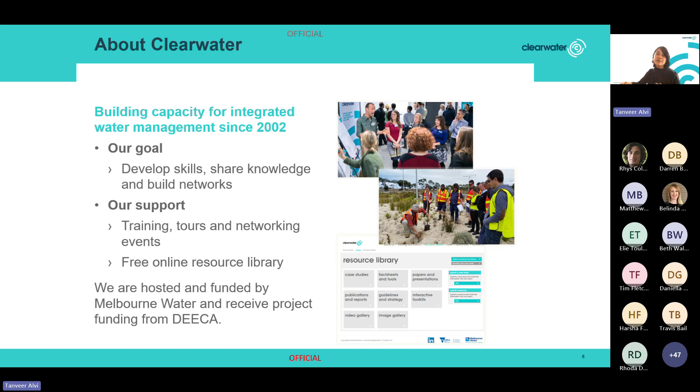We have a huge online library, I have a small inset over here. That is what our present resource library looks like. As you can see, we have case studies, fact sheets, presentations, video gallery, and trust me, there's a huge number of resources. This huge amount of data on the website is one reason that we are moving to a new website, which is really exciting. In a couple of weeks, if you visit our website and it doesn't look familiar, if the logo looks like this and the color palette looks like that, that's because we are rebranding and having a new website. You can still follow us on LinkedIn to keep up to date with all the changes.

Coming to our presenters, I'll quickly introduce Dr. Matthew Burns. He's a senior research fellow at the University of Melbourne. He's internationally recognized for his research in urban hydrology and stormwater management. He has 80 publications and over 4,500 citations, and his work highlighted the problems of urban stormwater runoff and advanced the understanding of flow ecology linkages, leading to better protection and restoration of our waterways.

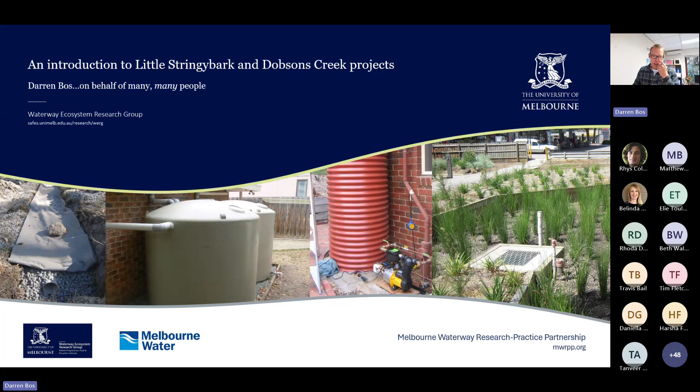Because we have quite a diverse audience, I am going to start by giving a little bit of background on the issues of stormwater, as I think we have some people in the audience who don't have a background in stormwater management. I'm also going to talk a little bit about the solution to that stormwater problem, and then I'm going to dive into why we undertook these projects and what work was completed in each catchment. And of course, that's leading us into the real reason why you're all here, and that's to hear about some of the results from our project.

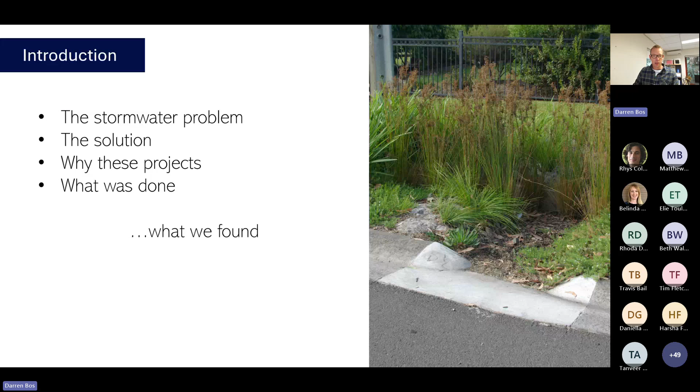So let's start with a little bit of that context. When we urbanise a catchment, we build roads and roofs, and then we typically install a whole range of stormwater pipes and pits to drain away any rain that falls on that catchment, on our newly built roads and roofs, and it drains away as stormwater. Those pipes are very, very efficient at delivering the water directly to the creek, and this completely changes the way in which water interacts in a catchment.

So in a forested catchment, when rain falls on a catchment, we see that most of the water is lost through evaporation or transpiration. A reasonable amount enters through the soil and flows to the creek as base flow, and very little amount of rain actually runs over ground and into the creek directly.

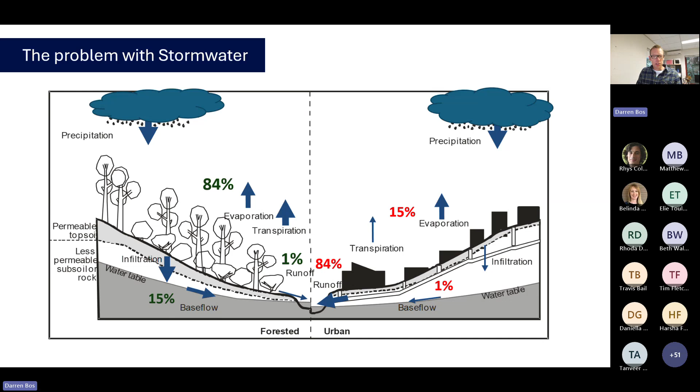Compare that to our urbanised catchment, we see a complete reversal of those figures. Now most of the water is actually delivered to the creek as runoff, and it's delivered very quickly and with a lot of force. Some water is lost through evaporation and transpiration, and very little water actually flows into the soil now because we've sealed a lot of the surfaces, so very little is delivered as base flow. What this does is it completely changes the hydrology of a catchment: how much water gets to the creek, how quickly it gets there, and the energy in that water when it arrives.

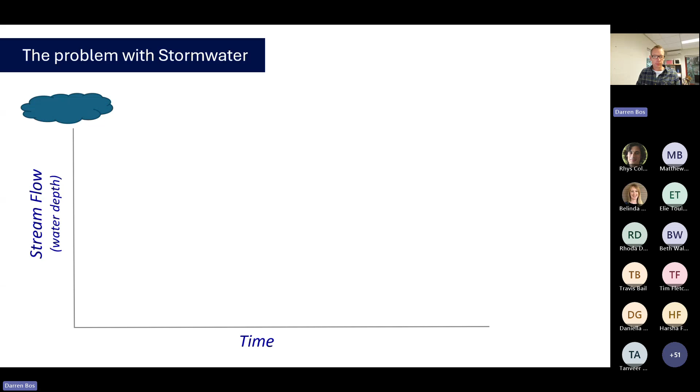So in this stylized hydrograph here, we can see that in an urban catchment, when we have rain, we get a really quick rise in flows or water depth in the creek, high peaks, and then quite a dramatic drop off in flows as well.

We also generally have a very low base flow in the creeks, compared to a forested catchment where we see that after rain those peaks are much slower to form, and they're much lower as well. They also have a longer tail, so the flows hang around and are a lot more steady.

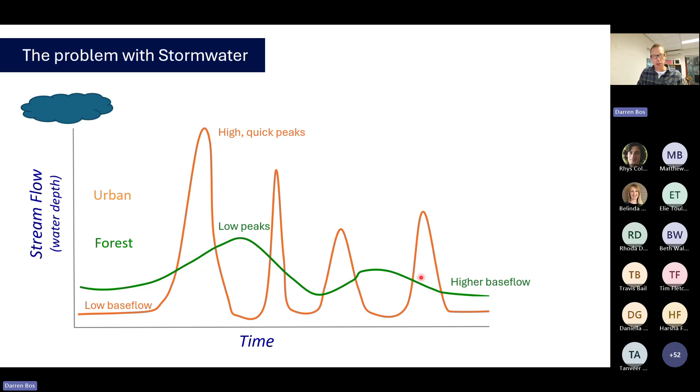What this change does is lead to these really high energy, high flashy flows in an urban catchment, which leads to severe erosion within the creek. The creek itself becomes quite channelized and loses engagement with the floodplain. We get a lot more mobilization of sediment, and the water becomes a lot more turbid with suspended sediments. That generally leads to a loss of habitat within the creek, and then we start to see a decline in biodiversity, particularly with species that are sensitive to these changes or that are used to more moderate flows and higher base flows.

If you add on top of that, stormwater pipes and pits are also very, very efficient at collecting pollutants and litter and delivering those into the creek as well. So you get this mix of dirty water and changes in hydrology, all affecting our creeks.

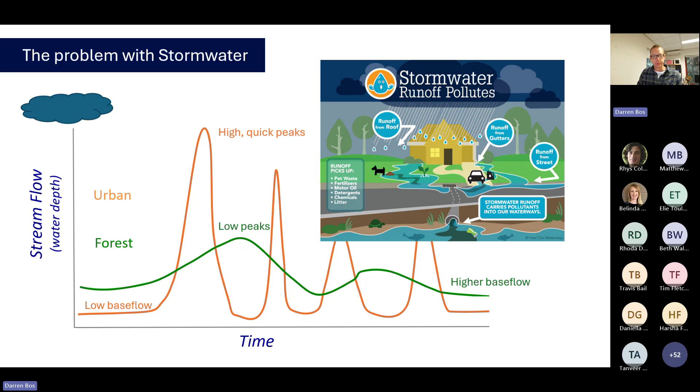Now, this is a very well-studied phenomenon across the world. It's not just exclusive to Australia.

Also well studied is the application of stormwater control measures to address this problem. Stormwater control measures are any asset effectively constructed in a catchment that helps reduce peak flows, return base flow to the creek, and improve water quality. They can include things like, but not limited to, rainwater tanks, rain gardens, or vegetated infiltration basins.

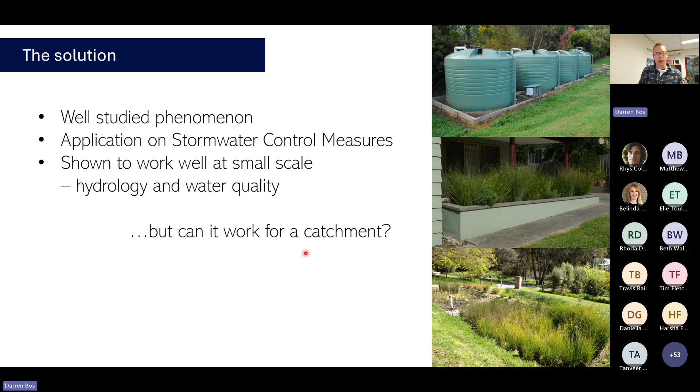Those stormwater control measures have been very well studied as well, and they've been shown to have really positive impacts on the hydrology and water quality of stormwater at a local scale. But prior to the Little Stringybark Creek and Dobsons Creek projects, there remained a question of what would happen if you applied this across the catchment. How effective would they be if you did it en masse rather than just at the allotment scale? In short, that's essentially what these projects were designed to answer.

Can degraded urban streams be restored by application of dispersed stormwater control measures? Specifically, the goal of those projects was to install as many stormwater control measures as they could in those catchments, jam in as many as they could fit, within the constraints of funding, space, and time they had. But the real goal was to treat as well as they could, as much impervious surface as possible, those hard surfaces that were impacting upon the creek.

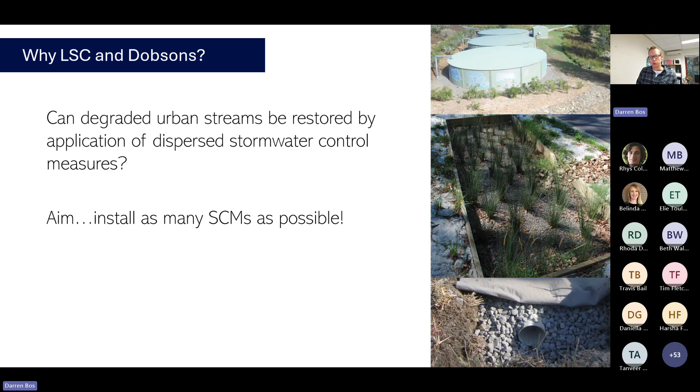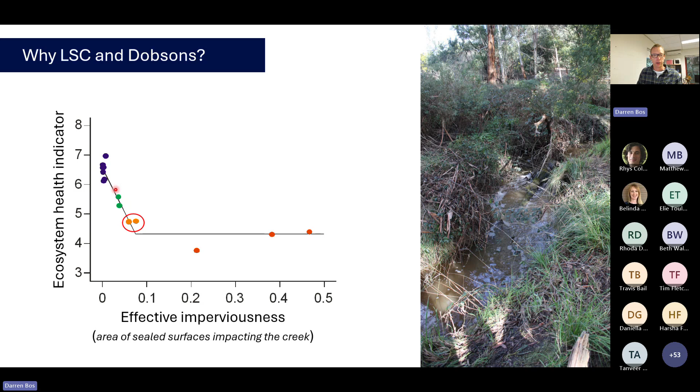All right, so a little bit about the two projects. Little Stringybark Creek is in Mount Evelyn, east of Melbourne, in the Dandenong Ranges. There are about 1,100 properties in the catchment, of which about 830 are connected to and impacting upon the creek. Most of those are up in the upper catchment. The lower catchment is mostly large rural residential properties, while the upper catchments are mostly residential. We have a small industrial site and a few schools as well, which are all big contributors to the issue of stormwater to the creek.

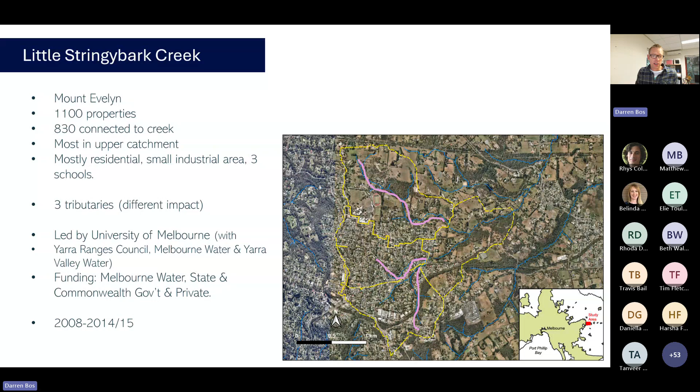There are 3 tributaries in this catchment, which is important, and Matt will elaborate on that a little later. This project, Little Stringybark Creek, was led by the University of Melbourne, in collaboration with Yarra Ranges Council, Melbourne Water, and Yarra Valley Water. It was funded through a combination of Melbourne Water, state and Commonwealth government funding, and also contributions from private landowners. It commenced in 2008 and ran until about 2014, 2015.

In that time, we installed stormwater control measures in just over 230 residential properties. All of those properties had a rainwater tank connected to internal supplies, like toilet, washing machine, some hot water. Some of those tanks were also leaky tanks—a leaky tank has a passive orifice that slowly leaks water back either into the stormwater or onto surrounding vegetation. A lot of our tanks also had infiltration trenches or some sort of rain garden, to encourage base flows back into the creek.

The participation of residents was encouraged through a combination of education and incentives, but I'll be talking a little more about that in my second presentation after Matt has spoken.

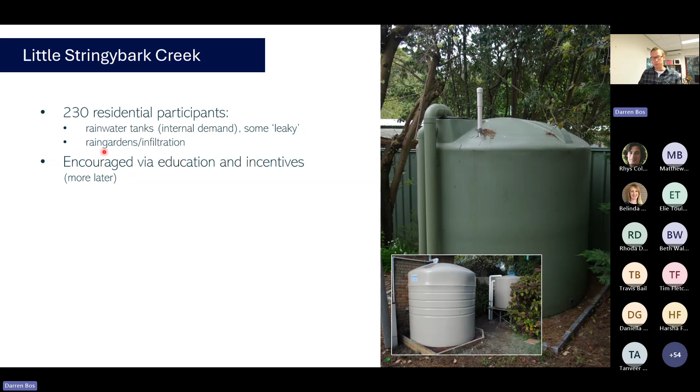Of course, we also had to address the non-residential hard surfaces, impervious surfaces contributing to the creek's health. So we installed 90 non-residential stormwater control measures, including public reserves and roadsides—roads are a big contributor to the problem of stormwater—schools, the industrial site I mentioned earlier, and also the one petrol station in the catchment.

So those non-residential stormwater control measures ranged in size from this large example here. This is at Morrison Reserve - over 700 kilolitres of tank used for irrigating a nearby sports field. It overflows into a series of infiltration basins, and also leaks out water during winter to provide capacity in the tank. So it ranged from that really significant, high investment site to much cheaper, simpler systems.

So this is just a small roadside vegetation infiltration rain garden - it's a mouthful. That's really just probably a few square metres in size, treating perhaps 100 metres of road.

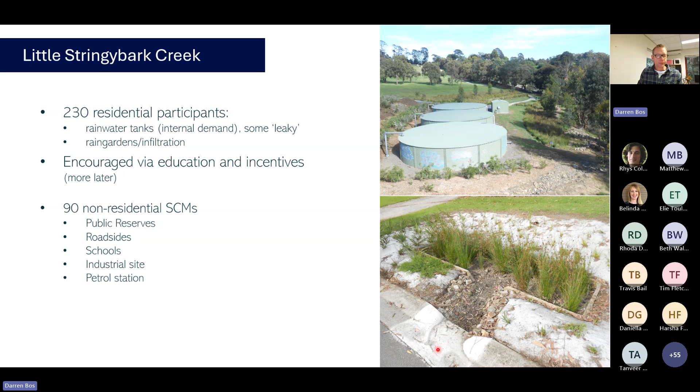So for Dobsons Creek, located in The Basin, also in the Dandenong Ranges, it's a bit smaller in terms of the number of properties impacting upon the creek, mostly residential for this catchment. But interestingly, this is quite different - the development is lower in the catchment, so the headwaters are all forested, which plays a bit of a story in our findings as well later.

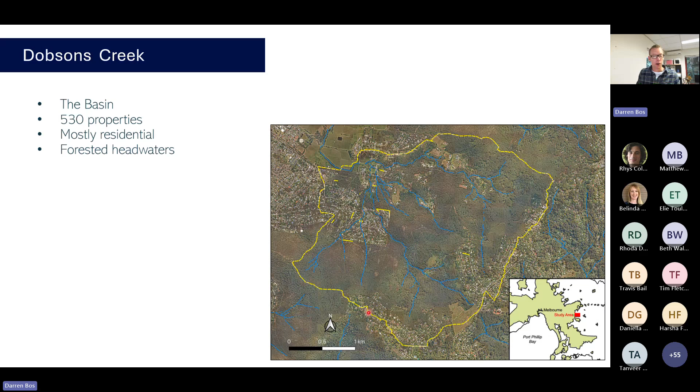This project was different in that it was led by Melbourne Water in collaboration with Knox City and South East Water, and was funded primarily through Melbourne Water with some state government investment as well. It was delivered between 2012 and 2017.

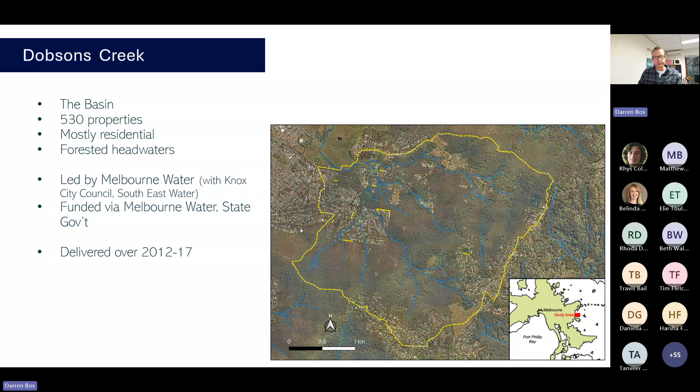They had around 250 residences, a little bit more than Little Stringybark Creek. They only used tanks, but they had two types - tanks for internal supply, again to toilet and washing machine, and some dedicated tanks which were leaky tanks, just providing storage capacity and some base flow replication as well.

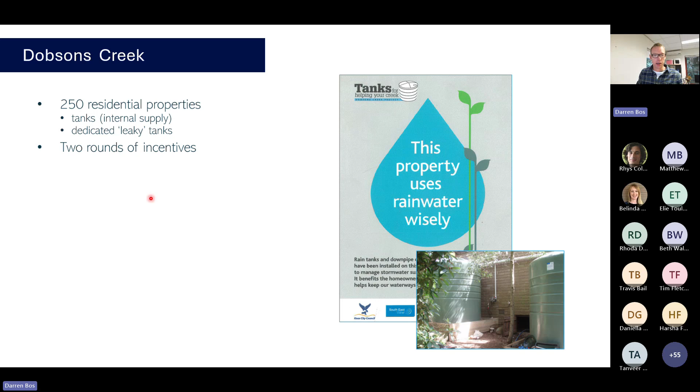And they delivered their tanks through two rounds of incentives. They also did some non-residential works on streetscapes, though not as many as Little Stringybark Creek. That was partly because they had quite a large, significant infiltration basin at the bottom of the catchment in Wicks Reserve, which did a lot, or provided a lot of treatment for the non-residential works and areas as well - a really significant size system there.

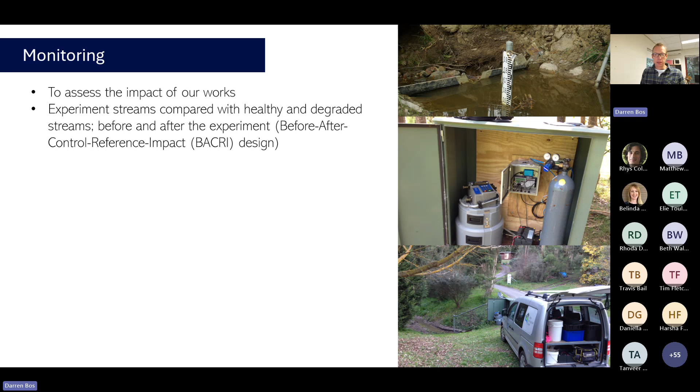Right, so as you can imagine, we needed to assess if all of these works were going to have an impact. To do that, we developed quite a comprehensive monitoring program. In this program, we compared our experimental streams with both healthy and degraded streams in the Dandenong Ranges, and we did that before and after our experiment.

Specifically, we monitored some assets for their performance, so some tank monitoring as well as some of our infiltration rain garden monitoring. We continuously monitored stream hydrology, and intermittently monitored water quality, the macroinvertebrate community, diatom community, the benthic algal biomass, and leaf litter decomposition.

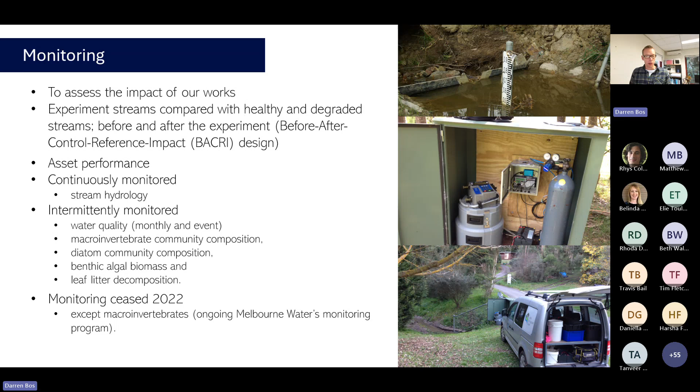And that monitoring continued from sort of 2008 or even prior, so we had some pre-works data as well, and up until 2022, although the macroinvertebrate data is still being collected as part of Melbourne Water's ongoing monitoring programs.

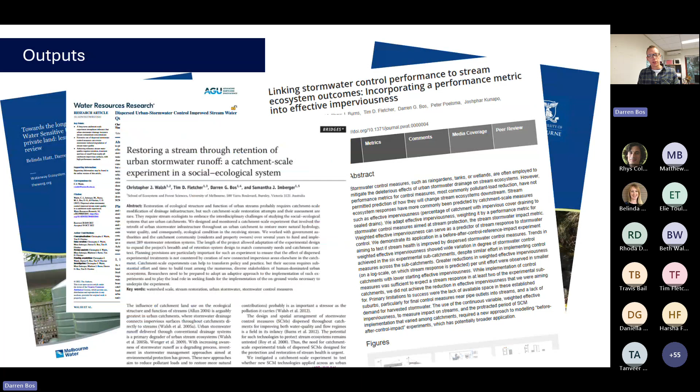As you can imagine, with such complex long-term research projects, there has been a lot of knowledge generated. This knowledge has focused not only on the key research questions around the impacts of stormwater on streams and the restoration of those through disconnection of the catchment, but also complementary research, such as how you engage with the community and local government, how you measure environmental impact, and so forth.

So lots of papers, conference presentations, YouTube videos, reports, newspaper articles - you name it, we've kind of done it. But of course, all this is really culminating now in a series of fact sheets that we have prepared, and that's really the catalyst for today. These fact sheets summarise not only the scientific findings of these two projects, but also the practical findings and insights, based on reflections of the research team or the people involved in delivering these projects. And we hope that these fact sheets will help to inform and guide planning and delivery of future waterway management projects.

They cover a whole range of topics, so there's 10 of them in total, and we will be just talking about a few of them today. We'll have to talk about others perhaps at another event another time.

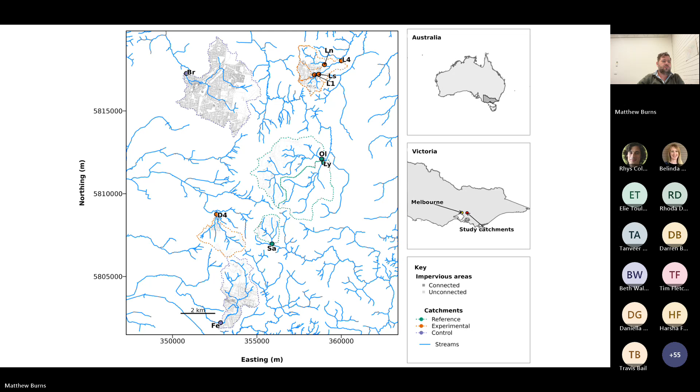As Darren said before, a lot of the basis for this project is the idea that if we can disconnect impervious areas, if we can improve the way we manage stormwater in these catchments, we might be able to improve the stream's ecological condition.

It's important to note that this study is an example of a retrofit project - probably the hardest context to do this work. The theory is that by implementing stormwater control, hopefully the ecological condition of Little Stringybark Creek and Dobsons Creek will start to trend towards the condition of the reference sites and away from the condition of the degraded control sites.

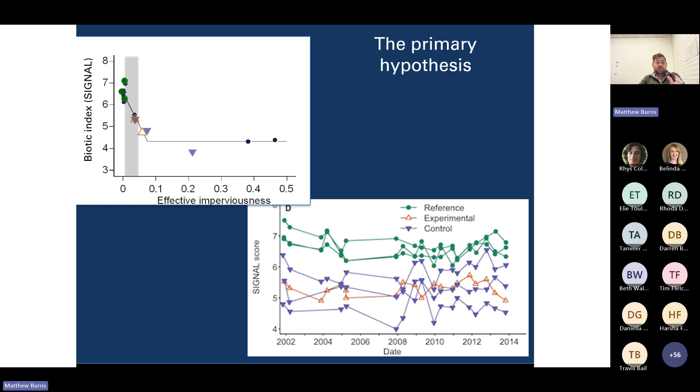Another important feature of the experimental design is that it allowed us to make sure that if we see an effect in Little Stringybark Creek or Dobsons Creek, it's because of the improved stormwater control, not because of things like climate.

I'm going to talk through some different responses that we think should happen when we disconnect impervious areas and reduce effective imperviousness, and then highlight what we found from those various responses.

The main experimental manipulation is to reduce connected imperviousness - that's what we set out to do. When we do that, theoretically, we should see some hydrological impacts, like reduced size and frequency of polluted stormwater runoff, and we should theoretically increase base flows and their quality.

As Darren said before, urban streams tend to have lower base flows. So through increased infiltration, we should increase those filtered flows and their quality.

The changes to hydrology and improved treatment of stormwater should lead to some water quality impacts, like reduced nutrient concentrations. Because we're slowing down stormwater flows and reducing that hydrologic impact, there should also be some geomorphic impact, like reduced transport of coarse sediment - we should start seeing more sand and gravels in Little Stringybark Creek and Dobsons Creek.

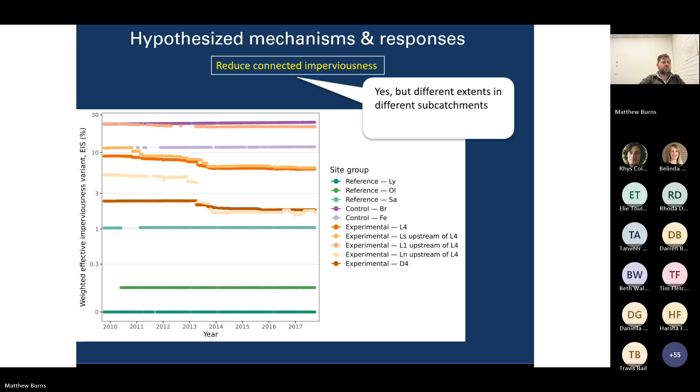Just another thing to quickly say is that the way we measured reductions in effective imperviousness took into account the performance of the stormwater control measures we implemented. That was a really important piece of work that Chris Walsh, a colleague, led, because you can imagine that a rainwater tank that might not have much demand or isn't performing very well, compared to one that is performing really well, will have quite a different ability to effectively disconnect that impervious catchment.

That's why it was really important that we spent a lot of time measuring and modeling the performance of these different stormwater control measures, and including that modeling and performance in the way we actually assessed our measurement of reductions in impervious area. There's a fact sheet, I think fact sheet 8, which talks about that.

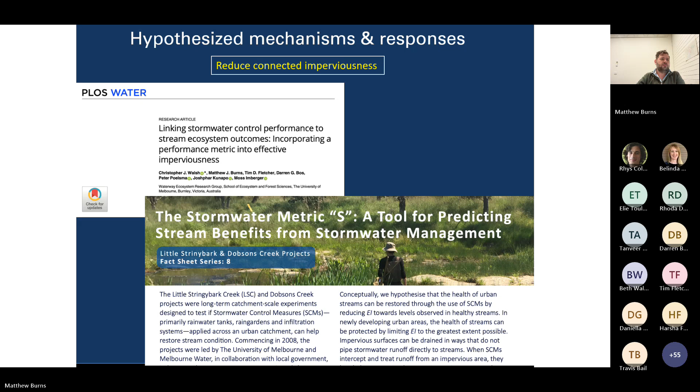So coming back to our responses, we can give a tick that we reduced connected or effective imperviousness. I'm now going to talk through some hydrology results. Did the experiment reduce the size and frequency of storm flows? We had a former student, Congying Li, who was a critical component of this hydrological assessment work, and there's a journal paper close to being published which talks about these results.

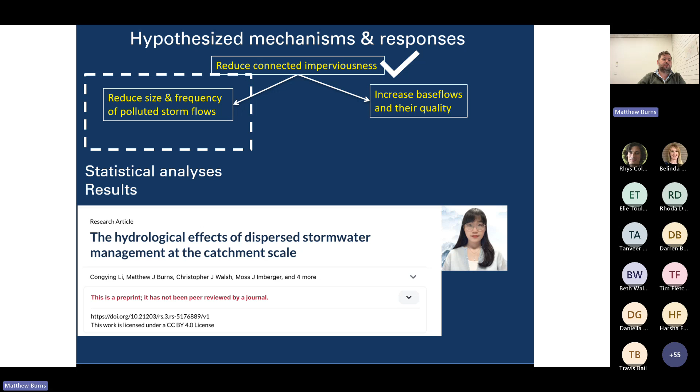In our urban catchments, we know that we only need a small amount of rainfall to cause a big pulse of stormwater, and that's what Darren started off his talk talking about. So for our urban sites, we have some rain, and that rain generates a big pulse of stormwater. A small amount of rain causes a big pulse of polluted stormwater runoff, which we can also call quick flow or direct runoff.

Theoretically, when we implement stormwater control measures, we should see quite a different hydrograph or flow response. We should have a lower peak flow, and importantly, a much smaller volume of quick flow, because we're retaining water, harvesting water, and infiltrating water. So the whole basis of this hydrologic analysis was to see, in Little Stringybark Creek and Dobsons Creek, have we reduced the volume of this quick flow in storm events, and have we also reduced these peak flows?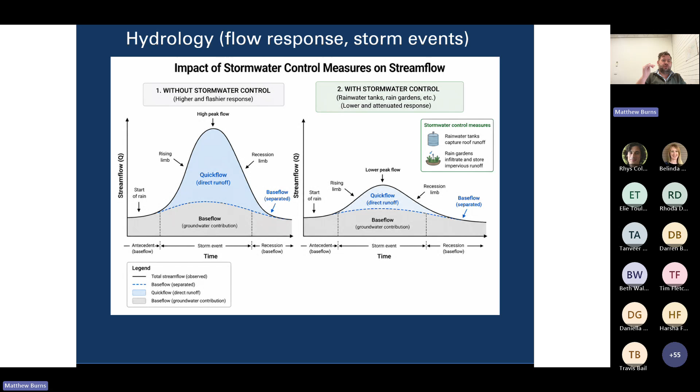And so to answer that question, we did some statistical analyses. This former student, Sung-Ying, spent about 3 months of her life identifying 6,500 storm events across our study catchments. From each of those storm events, we calculated quick flow volume, essentially the amount of impervious runoff or stormwater generated following rainfall events, and also calculated peak flow.

We developed a statistical model that was run in R, which is some computer software that we can do these statistical tests in. When running these statistical models, we included things like the effect of the stormwater control measures, basically capturing all the rainwater tanks, rain gardens, and other measures implemented, and of course took into account other things like rainfall and antecedent conditions. This statistical model allowed us to be pretty confident about whether these measures had an impact on the hydrology.

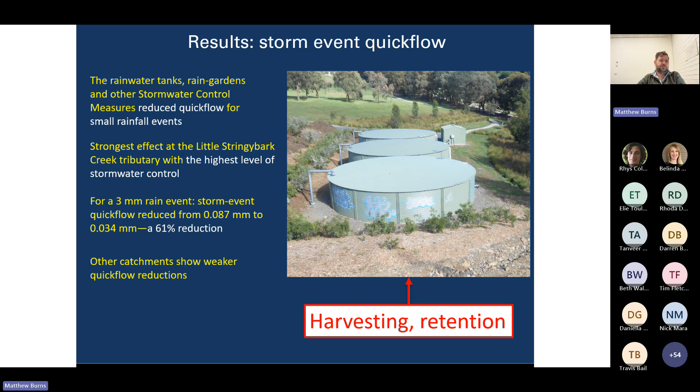A big reason for this reduction is that the project had a really strong focus on stormwater harvesting, on retaining stormwater in the catchment. Lots of rainwater tanks were connected at the household scale, many used for toilet flushing, clothes washing, hot water usage, and outdoor irrigation. There were some really large tanks - as Darren said, 750 kilolitres of storage, with water used to irrigate two really big ovals. This strong focus on retention was a key reason why we saw these results in terms of reducing quick flow volume.

In terms of storm event peak flows, we also found that the stormwater control measures reduced peak flows. In particular, for this tributary with the highest levels of disconnection, we found near-reference peak flows for up to 12 millimetre rain events, or 86% of the days. In other words, for most rain events, the peak flows in this tributary were hydrologically almost similar to what we saw in our reference condition stream. So another really good result there.

The effects we saw on peak flows were clearer across all catchments compared to the results for quick flow volume. While we got stronger results for peak flows, it's because all the systems we built might not provide high levels of retention, but they all provide good levels of detention and attenuation. For example, with rainwater tanks, there's always going to be some detention provided above the overflow pipe, and similarly with rain gardens and other measures - these systems can work quite well for attenuating peak flows. So that's sort of, at least hydrologically, why we saw stronger results for peak flows.

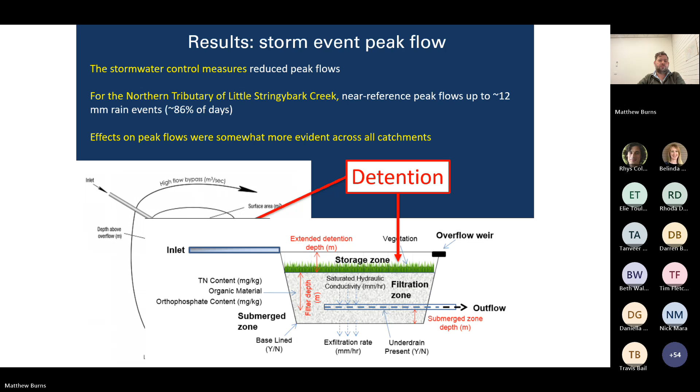So just a quick discussion around the hydrology. We found that our stormwater control measures can alter urban flow regimes in the context of a catchment retrofit, with reductions in quick flow and peak flow at the catchment scale. Our strongest evidence for that was when implementation intensity was high.

The real reason we saw these results is that these stormwater control measures were designed with hydrologic objectives in mind. We designed these measures to reduce the frequency of runoff delivered to streams, reduce stormwater runoff volume, and increase filtered flows or base flows. We also really tried to capture runoff from all impervious surfaces in the catchments. These principles that I've just been speaking about were published in a paper that we can send around.

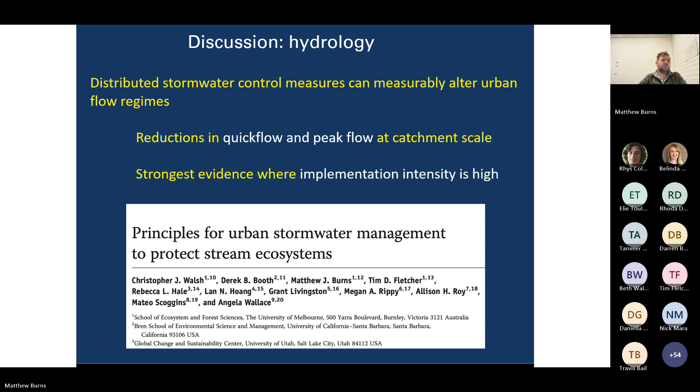Another important part of the results is that they were dependent on the rainfall event size. We found that the stormwater control measures were most effective at small, frequent rainfall events. In very large events, there were diminishing returns because the measures have limited storage capacity.

This is important because we think the primary stressor to in-stream ecological values is these frequent rainfall events. This is some work my colleague Tim Fletcher did. Tim showed that if you can retain even 5 or 10 millimetres of runoff, you can get really big reductions in how many days of runoff per year stormwater is delivered to the stream.

For example, if you can retain 10 millimetres of runoff, you can reduce the days of runoff per year from around 95 days to 20 days a year. So even capturing small amounts of runoff can have a really big impact.

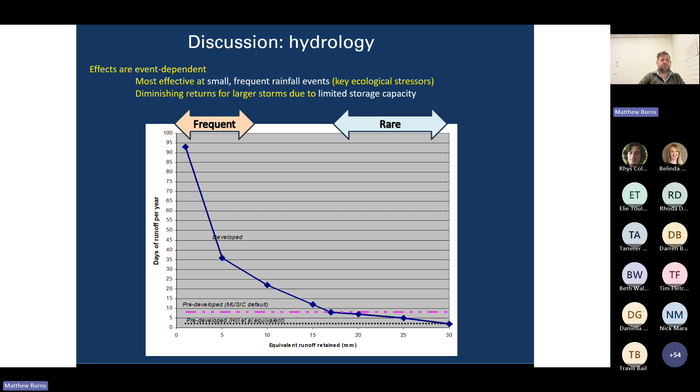Another point about the hydrology: we've seen these hydrologic results in Little Stringybark Creek and Dobsons Creek, but a word of caution that we can't easily transfer these results to another catchment. Obviously all catchments are different. The catchments we've worked in have quite clayey soils. If we were to do this project in a catchment with sandy soils, the results would have been different.

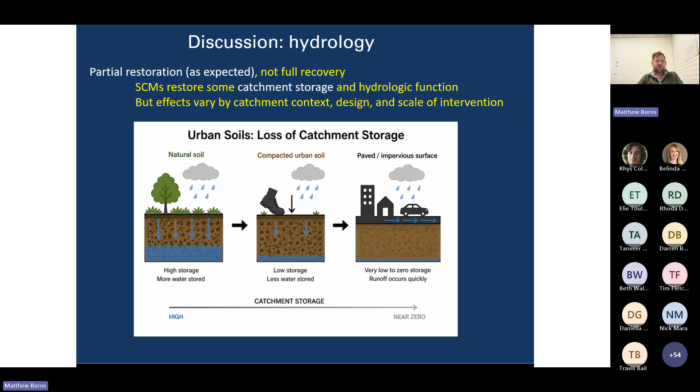Another point to make is that completely returning flows from a degraded urban stream back to natural is probably going to be difficult. One reason is that through the process of urbanisation, things like the soils get changed so much, and getting back to those very high levels of storage in a natural catchment is probably going to be difficult, but it's definitely still worthwhile doing.

So we've reduced the size and frequency of polluted storm flows. In terms of base flows, we're still doing analysis on that. With lots of infiltration, theoretically we should have increased base flows. We're still doing some work on that. We think through the water quality results there might be evidence of increased base flows, but we still need to do that formal analysis.

Okay, so I hope I'm going okay for time. Maybe, am I, Darren? I can't see anyone, but I don't know. Sorry. Yeah, okay, we still have like 10 minutes or 15 maybe. So yeah, great, we're good.

Okay, that's good. All right, so I'm going to talk now through the water quality results. Have we reduced nutrient concentrations because of the improved stormwater control? Our colleague Chris Walsh, who a lot of you would know, led this particular bit of work. I'm going to talk through the approach.

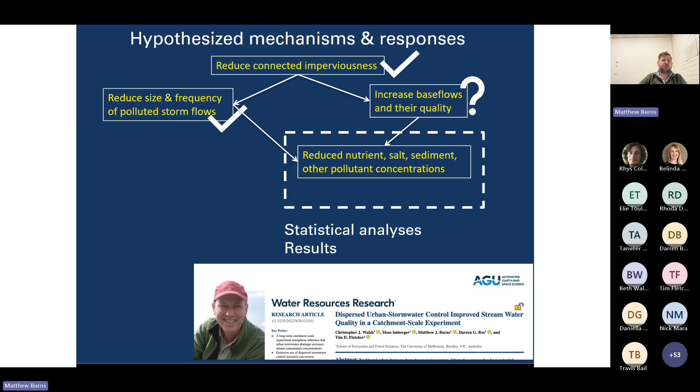In terms of the water quality, as Darren said, we monitored the water quality in our reference control and experimental sites. The water quality monitoring occurred over a pretty long period, 18 years of monitoring. It wasn't continuous for those 18 years, there were some little gaps in there, but it's a really large data set.

In terms of the water quality, we took regular samples. I went out there occasionally, but we had a lot of other great staff who led a lot of that work. We took regular samples, every month, every second week during dry flow conditions, and we also really aimed to get samples during wet weather.

In the field, we measured electrical conductivity and temperature. In the lab, we collected water quality samples and tested for total nitrogen, total phosphorus, nitrate and nitrite, ammonium, filterable reactive phosphorus, and total suspended solids. We took those water quality samples to a lab at Monash University.

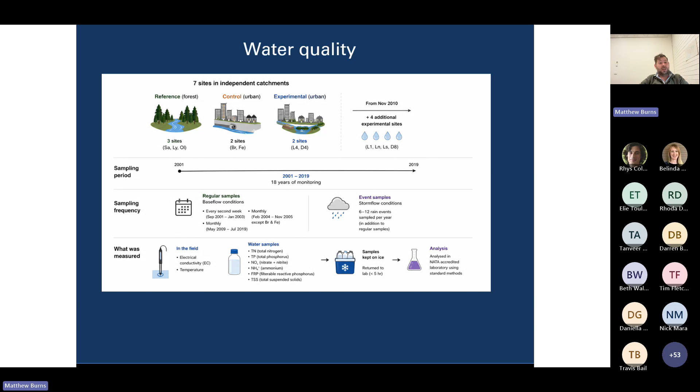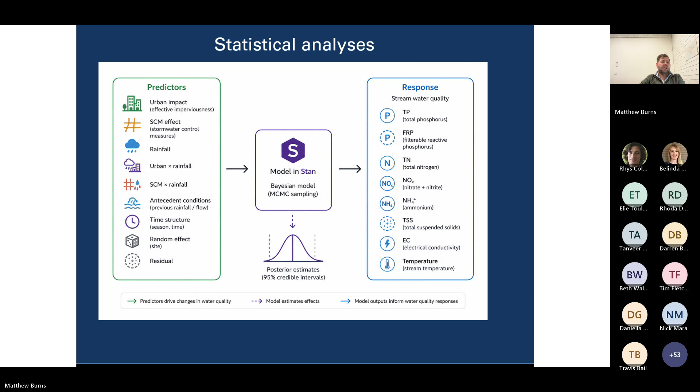So in terms of the water quality, we had some pretty encouraging results. We found that the stormwater control measures reduce nutrient concentrations under low flow conditions. Total phosphorus and filterable reactive phosphorus were reduced, and for some sites with very high levels of treatment, concentrations of these nutrients approached reference levels in dry weather.

We also found that total nitrogen and nitrate and nitrite were reduced, although the response for these parameters was a bit more variable, confounded by the fact that in these peri-urban catchments there are quite a few septic tanks, which are old and leaking, confounding the results a little in terms of the nitrogen story.

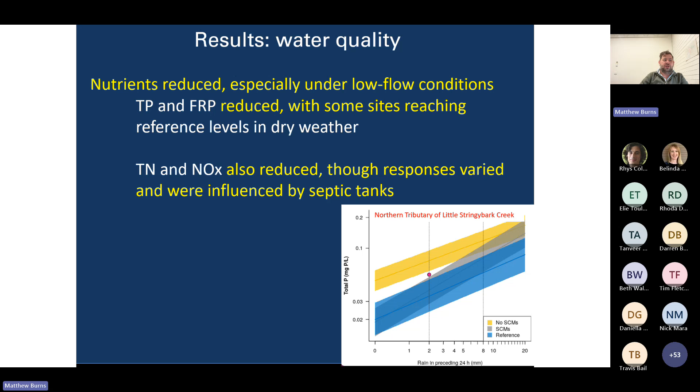Another water quality result related to temperature. We found that the stormwater control measures improved the thermal regime in these experimental sites. Our urban sites without stormwater control measures were 4 to 5 degrees warmer than our reference site, quite a difference. But importantly, installing the rainwater tanks and rain gardens reduced in-stream temperatures towards the reference condition, especially in summer low flow. So potentially a really good result there.

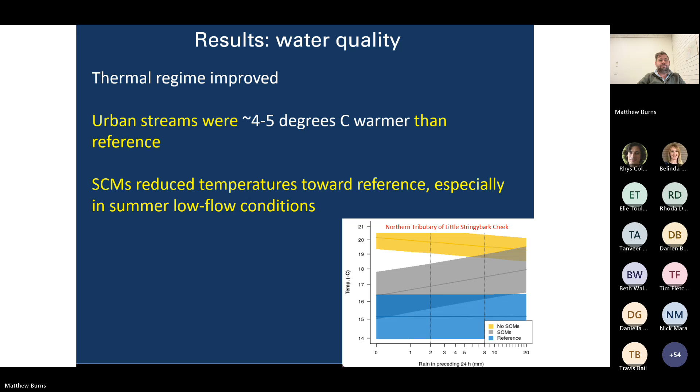In terms of some of the other results, there was a mixed or no response for some of the other variables. For total suspended solids, we didn't detect any effect of reduced imperviousness, and we think there could be some geomorphic reasons why that's the case, such as some resuspension of sediment from the stream banks.

In terms of electrical conductivity, or salinity, we found that it actually increased with the installation of the stormwater control measures. We're still working through that, and it could be that because we've increased infiltration and groundwater flows, some cooler but saltier groundwater is getting flushed into those systems.

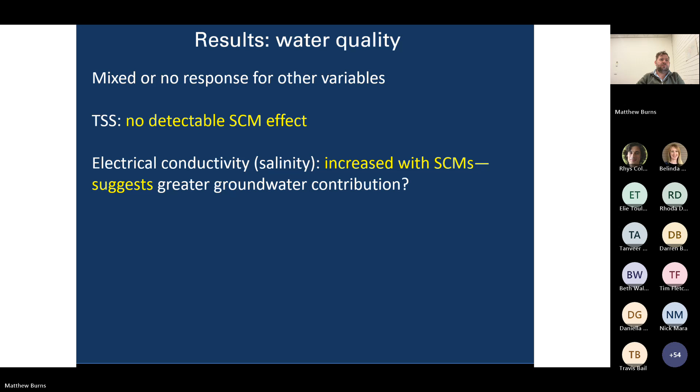So just a bit of discussion around the water quality. It's pretty cool that the water quality impacts are reversible. We can see improved in-stream water quality by implementing stormwater control. But similar to the hydrology, the strongest effects that we saw occurred in the catchments where we had substantial intervention.

One of the really important reasons why we've got these good water quality results is through some of these systems that Darren spoke about that were at the end of catchment, providing a final treatment of water before discharge into the waterways. A really good example is the Wicks Reserve Rain Garden in Dobsons Creek, a really large rain garden - I think its claim to fame is the largest in the Southern Hemisphere.

But it's doing a really good job of providing a final treatment effect. And there's a lesson for future developments: where you can, reserve some space near where the pipe outlets are to the stream for that final treatment.

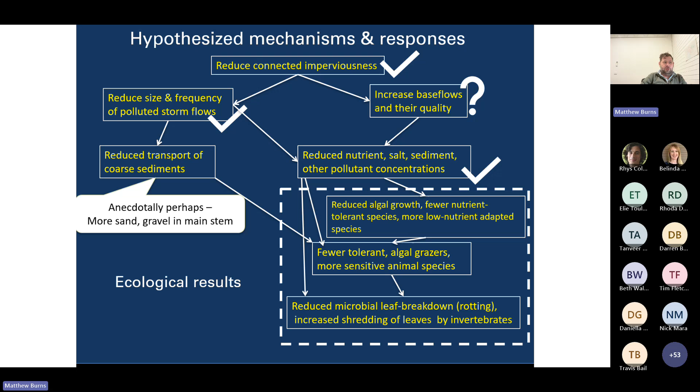So in terms of the stream ecological results, so far we haven't seen any change in some of the standard biotic indices. Things like SIGNAL score and LUMaR score, these are macroinvertebrate family composition metrics, and so far we haven't found any response to the stormwater control measures.

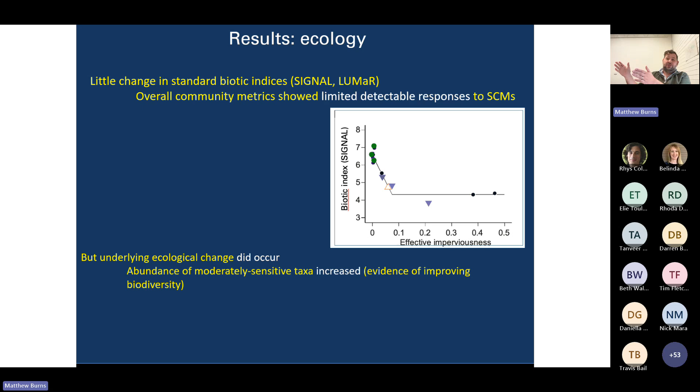But we have seen some underlying ecological change. For Dobsons Creek, we've seen that the abundance of some moderately sensitive taxa have increased, and so there's some evidence of improved biodiversity. We think that could be related to the fact that Dobsons Creek's headwaters are forested, whereas in Little Stringybark Creek that's not the case.

We've improved flow, we've improved water quality. To really promote this sort of further ecological recovery, we might need to start thinking about doing some in-stream works, things like maybe some riparian planting to improve habitat, and also thinking about putting some more coarse material into the stream, maybe sort of injecting some gravels or coarse material. That might be really important to support this recovery.

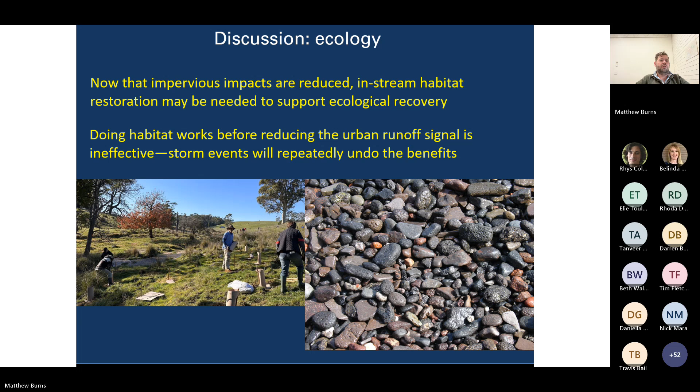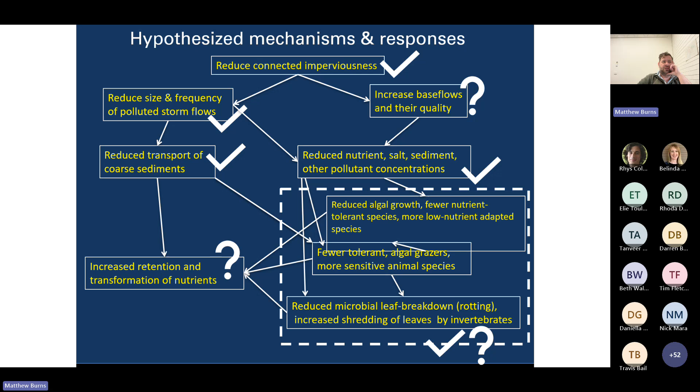So I guess I'm almost done. Just thinking about some other points as part of this whole retrofit project, if we want to really fully restore these degraded urban streams, we really need to get our head around this idea of trying to retain runoff from all impervious surfaces.

Not just a subset, and we've got really good evidence from that, particularly looking at this tributary where almost all impervious surfaces drain to some kind of stormwater control measure. Of course, as what Darren was getting to, there were some practical constraints which limited our ability to disconnect further.

A really big constraint was limited public space for stormwater control measures. We pretty much used up all council land, for example, that we could. So if we had more public open space, we probably could have actually built more stormwater control measures, or built larger ones than we ended up doing.

Another practical constraint was partial uptake by private landowners. As Darren mentioned before, in Little Stringybark Creek there were, I think, about 800 households. We ended up doing works on around 200 to 250, but there were hundreds of households that weren't engaged at all in this process.

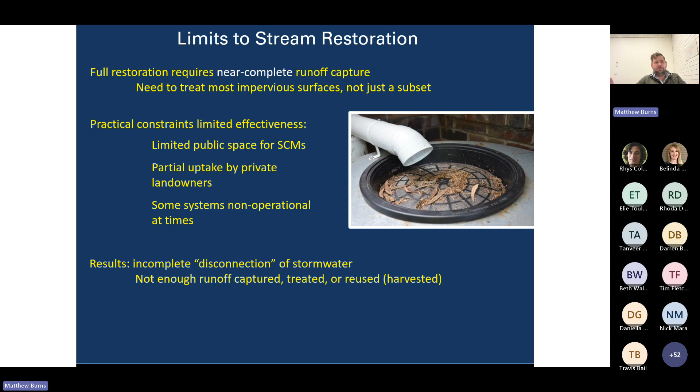Another important constraint was that some systems were non-operational at times. Maybe 20 to 30% of some of the rainwater tanks failed due to things like poor maintenance, pumps failing, things like that. In the end, I mean, we did an amazing job I think, particularly in this retrofit catchment, of disconnecting stormwater, but there were still opportunities to capture more runoff, to treat more runoff, and to use more runoff.

Another key takeaway for practice - we tested this idea of improving stormwater management in the hardest context, which is the retrofit context, the existing urban catchment. But we showed that it can be done.

We can implement rainwater tanks and other stormwater control measures if we design them to achieve certain hydrologic and water quality objectives - reduce runoff volume, reduce runoff frequency, improve base flows, treat water quality - then we can see in-stream improvements in hydrology, water quality, and in-stream ecology.

But in this particular retrofit example, we were limited by lack of participation in some cases, lack of space for systems, and we had trouble finding enough demand for stormwater.

But the lesson here is that for new development areas, for greenfield development, we can design everything from the start to be perfect, in the sense that we can make sure we allow enough room for our stormwater control.

We can make sure that, similar to what South East Water have done in Aquarevo, all new houses built have a rainwater tank with high water use, things like that. So a really important lesson there.

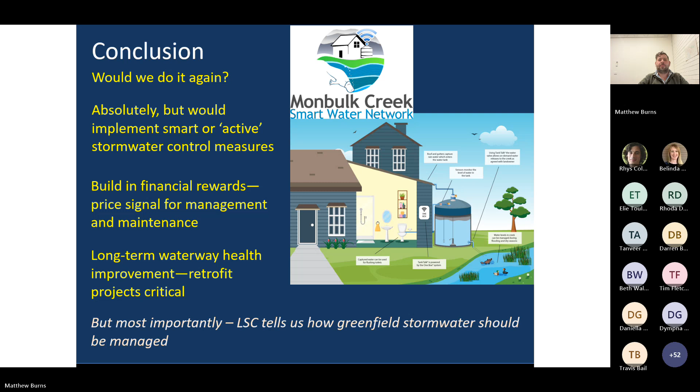Thanks so much, Matthew. That was really interesting and actually spot on time.

So the first question, of course, is why do you engage with the community? Well, that's because half of those impervious surfaces are on private land. So if you want to do a total catchment disconnection, at some stage you are going to have to talk to those private landowners. Our private land community engagement program was a combination of education and incentives.

The education program was really important because in Little Stringybark Creek, there's only about 100 metres of the creek that is on public land, so most of it's on private land. So we had to raise the profile of the creek. We also had to make people aware of the threats of stormwater, and also make them aware that they were part of the problem, but could also be part of the solution as well.

And then we ran three rounds of incentives starting in 2008, and we had various lessons from each incentive round, which I'll go through quickly now. In round 1, we called Stormwater Tender - it was a sealed bid uniform price auction, a little bit complicated sounding.

In this program, residents developed independently their own bids after receiving a big information package from us. They identified what sort of stormwater control measure they wanted to put on their property. They engaged a plumber to quote, or multiple plumbers to quote, and determined how much they wanted from us to build this stormwater control measure, typically a tank.

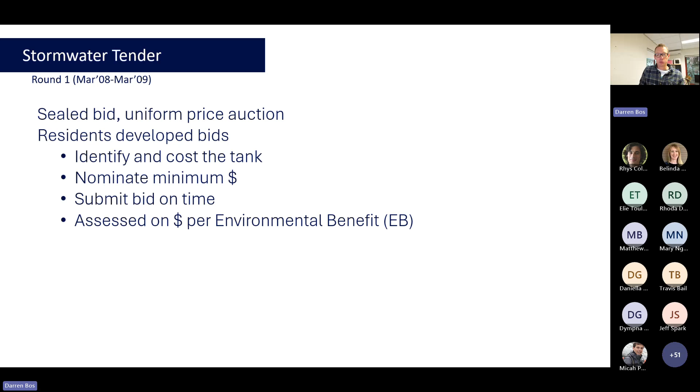Off the back of the millennial drought, we thought this would be quite easy, and indeed of the 800 or so houses, we generated quite a lot of interest. Over a third registered their interest in participating in this program. But unfortunately that didn't translate into a lot of bids. We only funded 54 houses in this first round, because there was a lot of complexity in the application of this tendering process.

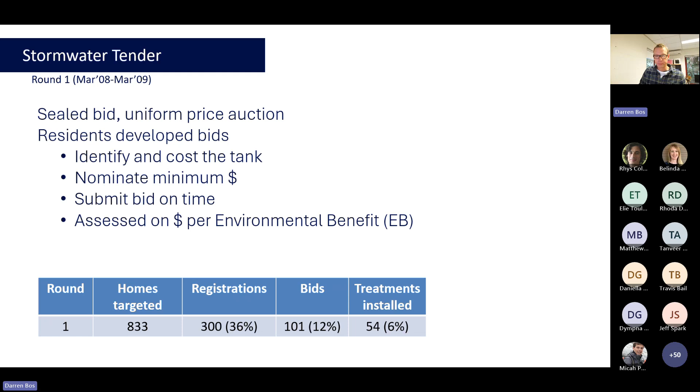So we had a bit of reflection as a team. We did some surveys, and we even had social scientists interview participants and non-participants of the program. What we found worked in our favour was having financial incentives, the environmental elements of the project - people were interested in protecting their creek - and also the fact that it was a research project worked in our favour.

What we needed to work on was creating more trust in the community, both in the offer of a heavily subsidised tank and in the process they had to participate through. We needed to reduce the financial outlay - in the first round, people had to pay for the tank themselves and then claim a reimbursement from us. We had to minimise the perceived risks, eliminate the big complexity, and allow more time for people to participate.

This auction had an end date. For some people that just didn't suit - life got in the way.

So after that, we reworked the way we were going to incentivize people to participate. In our second round, from 2010 to 2011, we called it Stormwater Fund, and this was a rising price auction. Effectively, we kept raising the price or the money we would offer to residents, and they simply opted in once the price was right for them. This process was much more community orientated.

The core of that was having a property appraisal with myself and a project plumber - we engaged a plumber to work specifically with us on this project. It was a simplified auction price format; effectively we filled out half of the forms for the applicants. At the end of the inspection, they would know what sort of tank or system they would have installed, what the total cost was, and what we would contribute at that time.

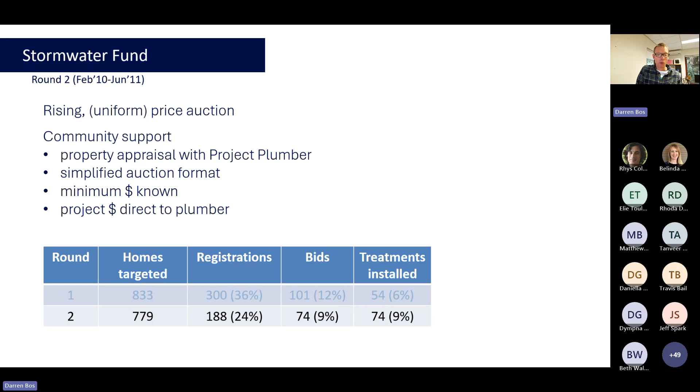So although we had less interest in this round, we ended up with more installations - 74 installations here. These were arguably more cost efficient for us as a project team because we were more involved in the design of the system. In round one, we had some people installing 50,000 litre tanks for 2 people just flushing a toilet, so they were oversized. But these ones were more efficient in terms of their sizing and cost.

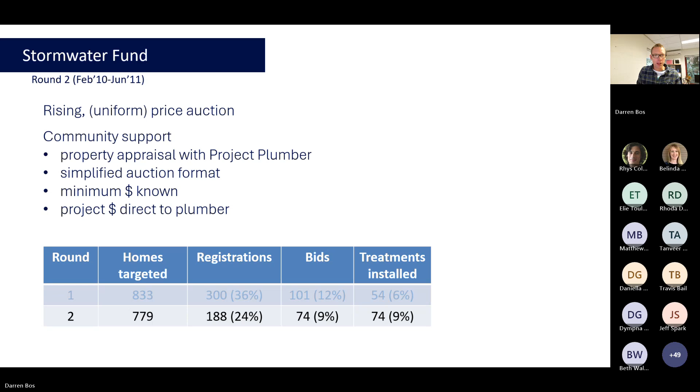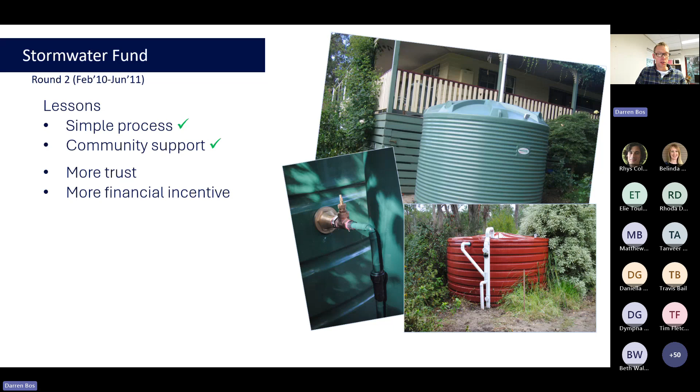So again, we had a reflection. We did another survey of some participants and non-participants. The lessons here were that the simple process was a positive, and the community support and extra involvement of the project team was well received. But again, we had issues of trust around the nature of these incentives, and financial incentives was still a big barrier - it was clear in the survey that the amount of money people had to contribute to install the tank was the clearest reason for not participating.

So in the third round, we were starting to get a little bit frustrated. Things were getting a little more critical in terms of the timing for the project. So we opted to offer free tanks to some of the properties.

So those properties that were in what we deemed priority areas - this was by far the simplest application process. A 60-minute property appraisal where we discussed the options for installing a tank and agreed with the owner what a tank would be, very cost efficient because the tanks were designed for the project but with some benefits for the owner. At the end of that 60 minutes, or in the weeks after that assessment, the owner just had to decide whether they were in or whether they were out.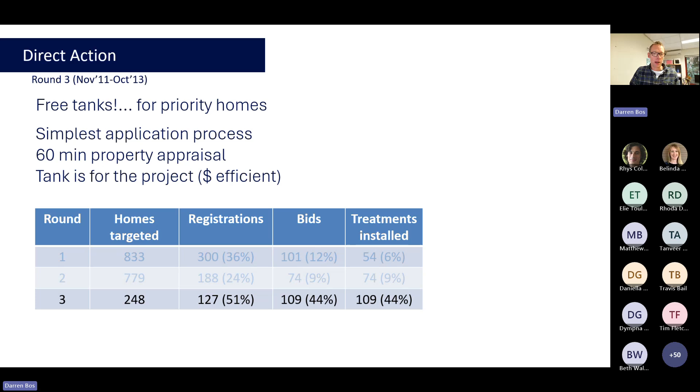As you can imagine, we had quite a lot of interest in this. We were targeting fewer people, but we had a high interest rate, and we funded significantly more properties, connecting them up to the system.

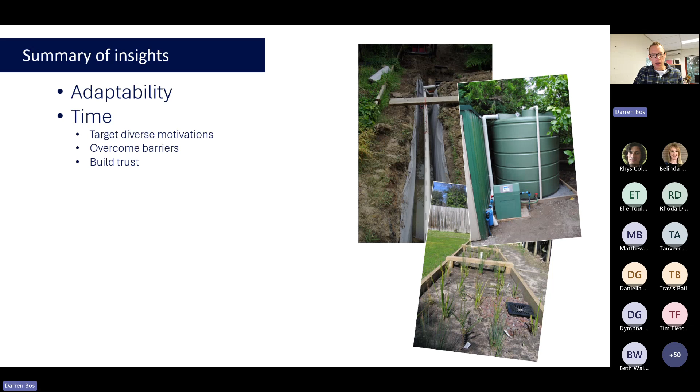So, summary of insights: being adaptable in the process was really important. This was made possible because of the extended time frame of our project. It allowed us to target a diverse range of motivations, whether that be community inclusiveness, water savings, or just the money incentives. We could overcome those barriers as they were identified. Most importantly, it gave us time to build trust with the community that the project was legitimate and that participation was low risk.

Having a personable approach was really important as well. At first, in the first round, we were deliberately somewhat standoffish - we didn't want to be seen as imposing or pressuring people to participate. But clearly people appreciated having a face to talk to, someone they could inquire with, and someone they could connect with the project.

What would have actually been good, I should say, meaningful financial incentives are absolutely critical - not just a token amount of money. Installing a tank is expensive; you need to cover a significant chunk of that cost if you want a lot of people to adopt your tanks. Also, I would say that having some prior knowledge of the catchment would have been more of an advantage.

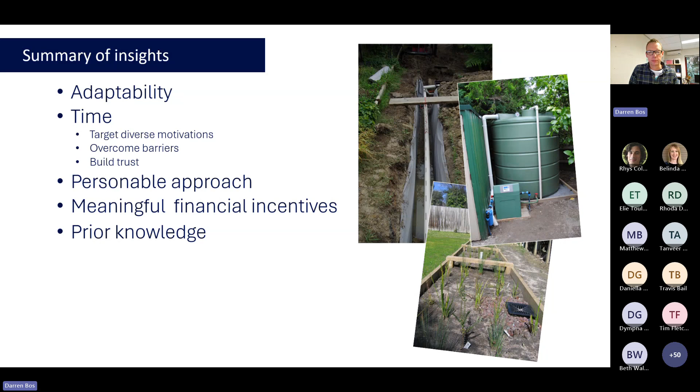We did do a survey prior to starting any works. We asked how many people would like a tank - 86% said they would, but unfortunately we didn't ask whether they would be willing to pay for that tank, and how much they would be willing to pay. So that was a bit of a missed opportunity. Dobsons Creek learned from our failings there - they actually developed a community profile and prepared targeted comms plans for their work.

All right, so that tells the story of getting the community involved initially, but how do you keep them engaged and participating for the length of the project? That's really important because the systems do need maintenance, and they will stop working if they're not maintained.

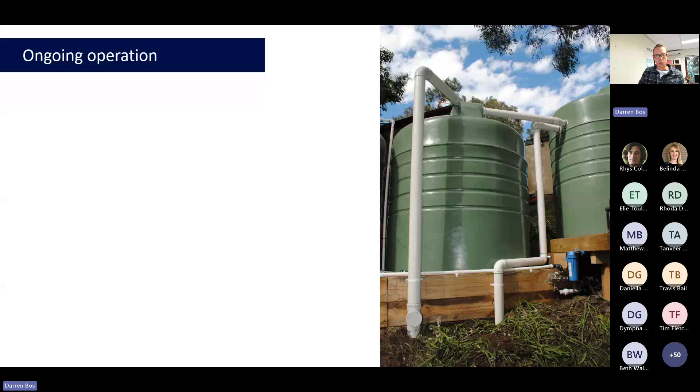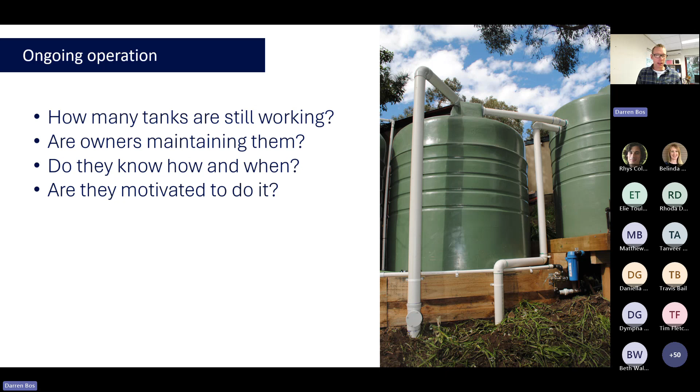After several years of working in the catchment, we started to ask ourselves - we've got tanks in there now that are 5 years old, how many of those are actually still working? The more we thought about it, the more additional questions we asked: are the owners maintaining them? Do they know how to maintain them and when they need to? Are they even motivated to do it? Do they even care now that they've got their tank or their money?

So in 2017, we developed a self-reporting survey on tank performance and distributed it to all the participants of our program. It was an anonymous survey, and people were given a small token gift for completing it. It had 23 questions loosely around their house, the status of their system, and operation and maintenance. We had 156 responses, which is really good - we feel this is a good indication of what's actually happening in the catchment.

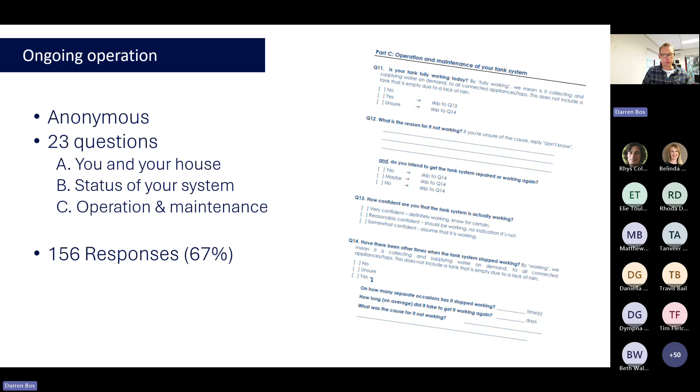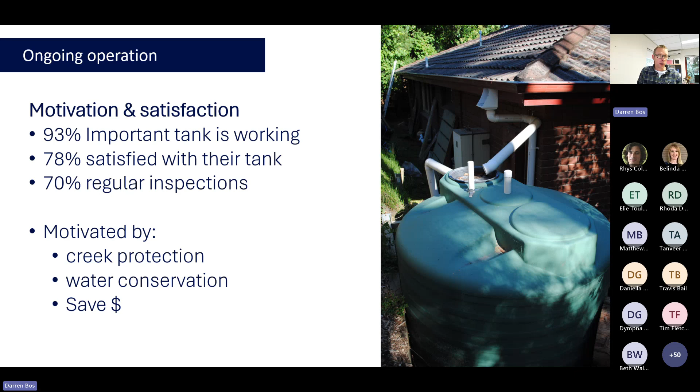In terms of operation and maintenance, 79% said their tank was working, which is a nice, high figure, and only 4% of those assumed that the tank was working.

So we get the impression that people are aware or monitoring their tank, so they're confident that they know it's working. Nearly 40% had said it had stopped working at some stage or that they had made a repair. What's a little concerning is the range it takes to implement those repairs, or how long their tank is non-operational, between 1 day to 1 year.

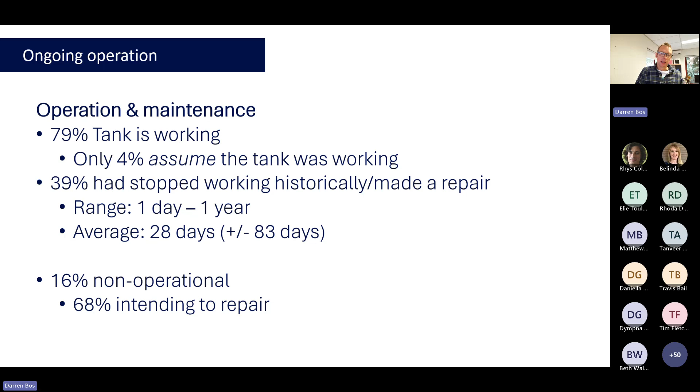What is positive, I suppose, is that only a small percentage were reported as non-operational. Still, 16% is nothing to sneeze at. It's nice to think that nearly 70% were intending to repair those tanks in the future. A little concerning, though, that 30% perhaps weren't or were unsure if they were going to repair their tank. So there seems to be a little bit of a disconnect between the interest in their tanks.

So people like their tanks, but it does seem to take time to actually effect a repair. We wanted to explore this a little more, so what we did was ask them to rank a number of common household appliances and report how many days it would take them to seek a repair if it broke down. As you can imagine, the car was the quickest to be repaired, things like the washing machine, and unfortunately for us, our tank system was way down the bottom there. That's not really surprising, of course.

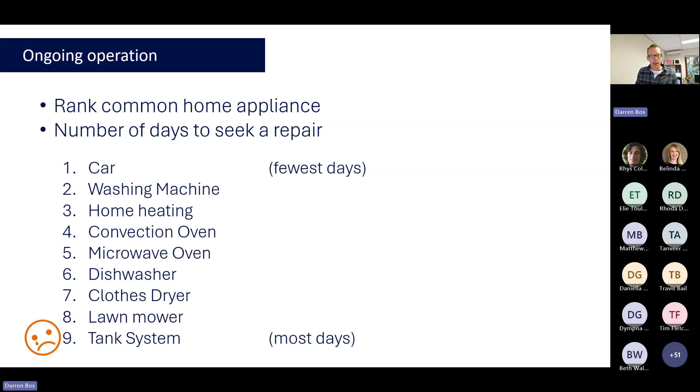Cars, washing machines, home heating on a day like today are highly essential items. If they break down, you address them quickly. Tank systems, not so much. Lawnmower, not so much. And what goes against the tank system is that they all have inbuilt redundancies - so if the pump stops, it switches back to mains water and your toilet still flushes. So that's something working against it getting repaired.

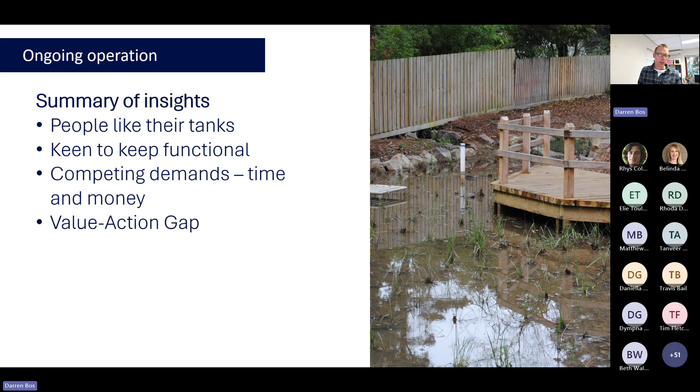So in summary, people like their tanks, they're very keen to keep it functional, but there are competing demands of time and money, and we label this the value action gap. Our recommendation is to recognize that at any one time, you're going to have a number of residential systems that are non-operational. Design the system - so you should design your whole catchment experiment with built-in redundancies if you can.

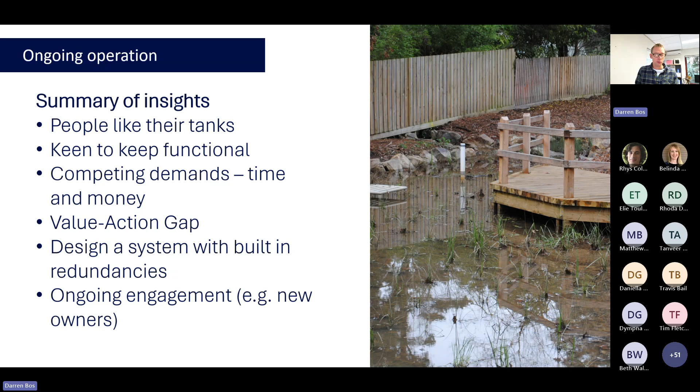But also we would encourage project leaders to have a program of ongoing engagement, to make people aware that their tank, even after 5 or 10 years, is still doing a good job towards helping the local creek, and also to engage with new owners, because there's a regular turnover in home ownership in these catchments. And I think that is the end of my slide.